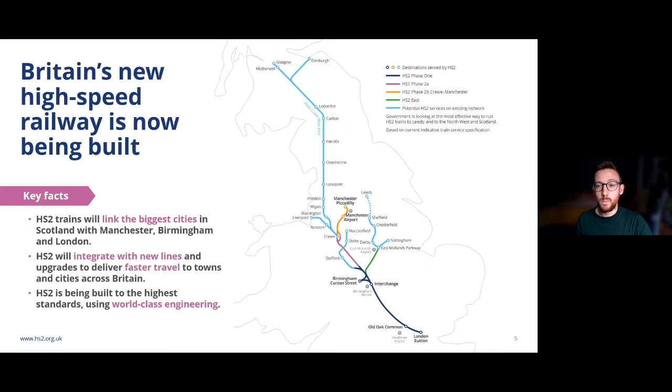If we were to achieve the same level of economic and environmental benefit seen from high-speed rail in mainland Europe and Asia, Britain needs a nationwide high-speed rail network. And HS2 will be exactly this, Britain's high-speed rail network, helping to address the three key problems facing the nation: capacity, carbon and connectivity.

In terms of capacity, UK rail demand has more than doubled in the last 20 years and is forecast to keep growing, with significant passenger pressure on key north-south routes. Further upgrades to current lines would cause significant disruption for passengers and line-side communities and would deliver a fraction of the capacity of a new railway line.

So building HS2 unlocks a massive amount of space on the existing railway by placing high-speed passenger services on their own pair of tracks. HS2 adds hundreds of thousands of seats onto the network each day, and by taking long-distance services off the existing rail network, it frees up space for more freight services, as well as local and regional passenger trains. It's also about connectivity.

HS2 has the potential to change the economic geography of the country and be a catalyst for growth, bringing Britain closer together. There can be more investment in the Midlands and the North, opening up leisure and job opportunities for millions of people. And importantly, it's also about carbon.

Transport is the UK's largest emitter of carbon. For the UK to tackle climate change while supporting a growing economy and population, it needs more zero carbon forms of transport, which HS2 will deliver from 2029. We'll offer zero carbon travel as a clean alternative to long distance car journeys and flights, and that'll help the UK tackle climate change and improve air quality.

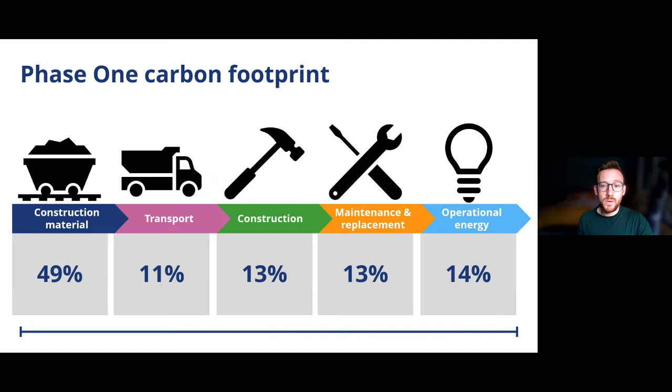About half of the carbon footprint is associated with the extraction, processing and manufacture of raw materials and construction products. About 25% is associated with the transport of those materials and products to site and the subsequent construction and installation processes. So about 75% of the carbon footprint is associated with the construction phase, and the remainder is associated with the next 120 years, the maintenance and replacement, and all of the energy consumed to operate our trains, stations, depots and infrastructure.

At HS2, we recognise that we have a unique opportunity to play a significant role in advancing and accelerating decarbonisation across construction and manufacturing. That's why we're implementing carbon management best practice across delivery.

We've also instructed and mandated this to our main work contractors, so they're required to implement the same carbon management best practice. That means HS2 and our supply chain are working within a common carbon management framework, with compatible and complementary processes in place that support effective and efficient delivery of our carbon reduction objectives.

But we're well aware that reducing carbon is as much about changing behaviours as it is about changing processes. So we know that we need to raise awareness, build capability and motivate action to deliver lower carbon solutions. As part of building capability, we've developed a programme of carbon literacy training, which seeks to provide colleagues with the motivation and capability to take action to reduce carbon emissions.

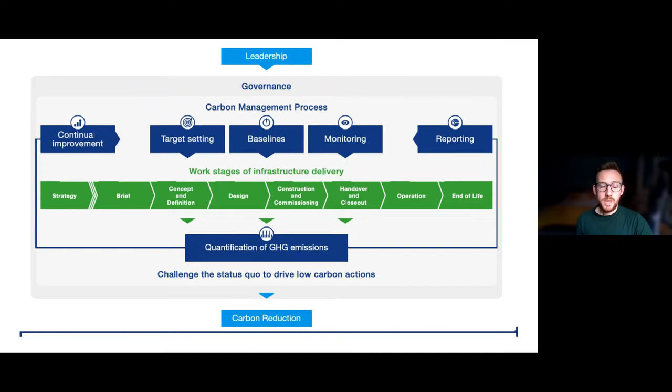In terms of tangible carbon reduction examples, we have Align joint venture, who are delivering Colne Valley Viaduct. They're on track to cut the amount of embedded carbon by 28% within that structure, and that equates to over 63,000 tonnes of carbon dioxide emissions.

They've done this by working really closely with our rail systems experts, and through that they've been able to narrow the structure by over a metre. That's enabled a significant reduction in the amount of concrete and steel needed and the associated carbon emissions. They've also significantly reduced the amount of earthworks required for the approach embankment, reducing carbon emissions from the transport of materials to site, and helping to reduce disruption for local residents by cutting the number of HGVs on local roads.

Thame Valley Viaduct is another great example, delivered by EKFB, showing how contractors are using the latest engineering techniques to reduce carbon emissions from construction. The design team simplified the structure of the viaduct so every major component could be made off-site before being assembled on-site, effectively slotted together like a giant Lego set. That's cutting the carbon footprint by an estimated 33%.

As well as cutting embedded carbon in terms of materials, the approach requires fewer lorries to deliver material to site, cuts waste, and will reduce disruption for the community during construction.

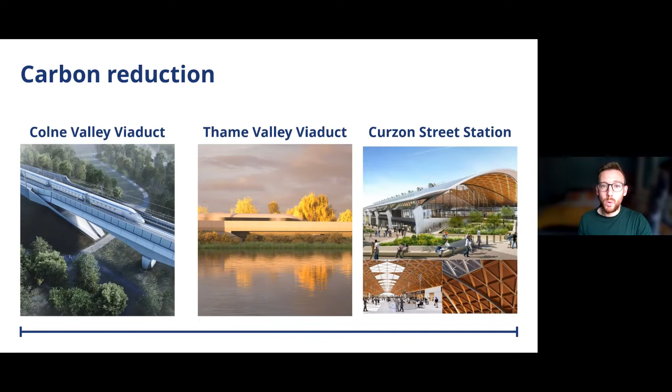The paving in the public realm has been reduced in depth by 38%, which reduces embodied carbon. And we're also using 100% recycled content steel roof sections, which will be bolted together rather than welded to aid future reuse and maintenance.

So our work to cut carbon emissions is well underway. We have the right processes, systems and tools in place, and they've been independently verified as being in accordance with best practice. We're a carbon literate organisation, and we provide our colleagues with the knowledge, motivation and ability to take carbon reduction action.

Since 2016, we've been working to halve the carbon footprint of phase 1, so we're already delivering substantial carbon reduction. We're making good progress against that target, with a 25% reduction forecast by the end of March 2022.

But we want and need to go further, and that's why at the start of this year we launched our net zero carbon plan. The plan explains the work we've undertaken to date, what we're doing now, and importantly, it maps the progress we'll make in the years ahead on our journey to achieving net zero carbon emissions in 2035.

The plan includes a few headline targets, namely to become a net zero carbon business by 2025, to deliver zero carbon travel from day one of operation, and to achieve net zero carbon construction and operation from 2035.

What we mean by that is that we'll reduce emissions as far as possible, and from 2035 we'll offset the residual carbon emissions that we can't eliminate as we build, maintain and operate HS2.

So we plan to work towards net zero by, for example, eliminating diesel on all our construction sites by 2029, specifying and purchasing concrete and steel with half the production carbon emissions of 2021 levels by 2030, and using 100% zero carbon energy to power our trains, stations, depots and infrastructure.

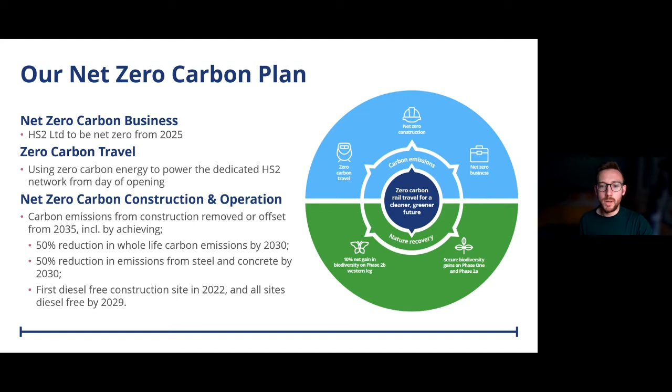To support those targets, we've identified 10 key action areas that will be critical in delivering our ambition. These action areas are really diverse in nature, but for example, they include building a consistent net zero carbon culture, raising awareness, motivating action and building capability to drive carbon reduction performance, and communicating our net zero carbon objectives to stakeholders, being clear about how we'll work together.

There are opportunities to use digital engineering tools and processes to transform and improve project delivery to reduce carbon emissions. We'll need to invest in innovation and form partnerships to speed up ways to cut emissions in our supply chain.

We'll need to work with industry groups and peers, supply chain partners and key stakeholders to make sure our efforts are aligned, effective and inspire action. We're also committed to sharing best practice and lessons learned with the wider construction sector, and we'll need to use our influence to encourage others to take action to tackle climate change.

There is a lot to do to get to net zero, but our work to cut carbon emissions is well underway. And to show you what that looks like down on our sites, I'm going to pass you over to Andrea.

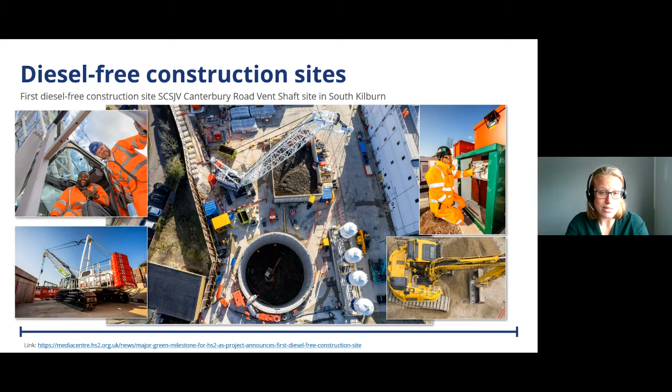I already mentioned our fully electric crawler crane, but we've in fact got 3. So we have 1 at Canterbury Road ventilation shaft, and we have 2 at our Old Oak Common station. As I mentioned, they are fully electric crawler cranes, and we've got 2 160 tonners and 1 250 tonner. So they're really, really big machines. Again, powered by batteries, charged on mains power connection, and then they can run off that umbilical cord system.

You may have seen in the media, but our contractor up north, BBV (Balfour Beatty VINCI), recently deployed a fully electric piling rig to really look at the comparison between a fully electric machine like this versus the diesel alternative. The results have actually been really fantastic. The operators are saying it's a lot more responsive, less pressure on the operative working in the cab, which is really positive to start seeing. So we're hoping there will be more machines like this at this scale and size that we can start to really use and trial across the project.

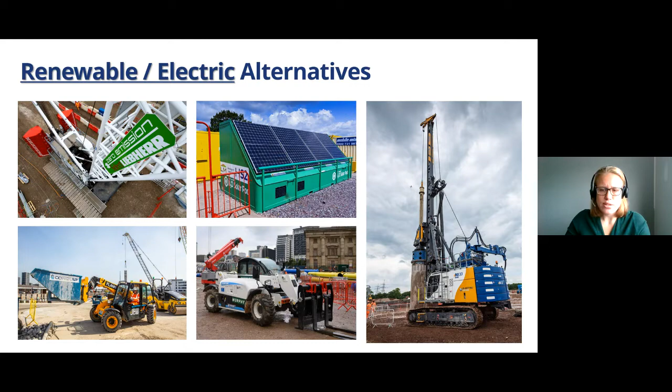Some of the other solutions, hydrogen has obviously been a big buzzword for a while now. It's really great that we've got a range of different solutions, from fuel cell tower lights to welfare units. We've also been trialing two very big hydrogen fuel cell generators, both 250 kilowatts, which are direct replacements for diesel generators at our Victoria Road crossover box in Ealing. The key there is the learnings from these trials will be shared with all of our joint ventures as well as the wider industry, to identify where we can adopt these, what were the challenges, what were the barriers, and how do we get over those to really push these sorts of technologies as construction norms.

Not only are there absolutely zero emissions, they are far quieter, and the only byproduct is deionized water. I was recently on site and did have some - it tastes exactly like any other water you would taste. So it's a really fantastic technology that we're starting to see really increase in uptake across the construction industry.

Essentially, the engine runs off biogas rather than diesel. It's been twofold: the first phase, the engine was fitted into a hybrid Advantair welfare cabin, which makes use of solar panels with the clean air gas engine as the backup power source. Then Oaktech have recently been trialing their standalone generator, which again runs off biogas. Imperial College have undertaken the emissions testing on the engines, and the results are very, very positive.

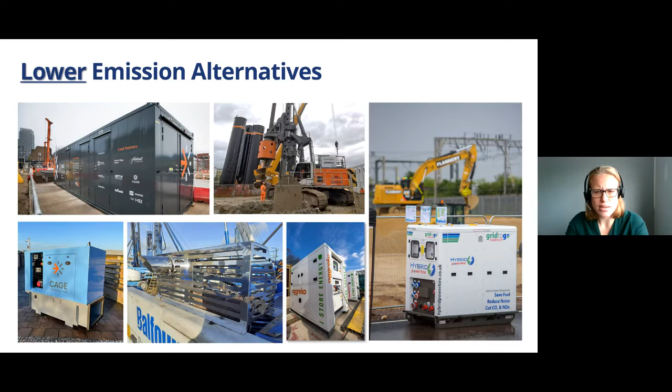We've also been working with Eminox on retrofit solutions to bring older diesel engines in line with the latest, cleanest emission standards. I mentioned the use of biofuels previously, and using battery storage solutions to reduce our diesel consumption, which leads nicely into what other efficiency solutions are there, which is really important within the construction industry, where we don't have diesel-free or diesel alternative solutions yet. What can we do now? Those come in all shapes and forms, from changing methodologies on site to be more efficient, to using different solutions such as retrofit, or hybrid solutions.

We've also been trialing flywheel technology, which stores up the energy so you can have a much smaller generator. You also don't need your generator running for 8 hours a day - it can now be 5 hours a day. So you're really just reducing your fuel consumption, reducing your impact on surrounding communities.

There is a lot of information on these different trials on our HS2 webpage. If you look for the HS2 and air quality webpage, you'll see a bit more information on some of these case studies. As more information on these trials becomes available, we do put it out into the public space and share it across the industry, so that we can all be aligned and making use of that information.

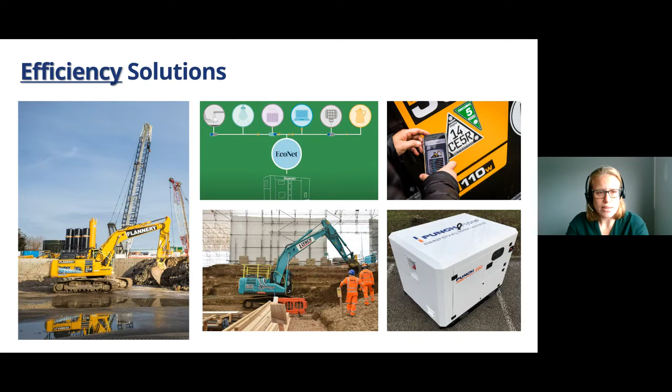Which essentially, just to conclude then, as Mark said, it's not simply a case of saying we think it's right, we'll do the trial and we'll stop there. It's how do we make this the new construction norm? How do we roll this out at scale and use the scope and stretch of the HS2 route to do that?

We're working really closely with the Department for Transport as well as other arm's-length bodies to align plans in the diesel-free space, to make sure we move forward on this journey as an industry and not in our individual silos. We're working with Construct Zero to develop an industry-wide diesel elimination roadmap, which, with implementation of innovations like those already highlighted, will aim to mitigate the risk linked to escalating fuel prices, as well as accelerate the reduction in emissions and meet the objectives we've set out.

There's a lot of work being done in the background, and where we can, we're trying to take immediate action. We've been working on an anti-idling toolkit, which will be released very soon to the wider industry. What that looks at is what we can do with what we've got right now, and simply around education and changing behaviors, we can have a really big impact. We're collaborating with the Supply Chain Sustainability School, our suppliers, our contractors, and academia to make sure we can have a useful pack that the industry can use. So it really is a watch-this-space situation - there's lots more coming as we make progress on our diesel-free journey and ambitions.

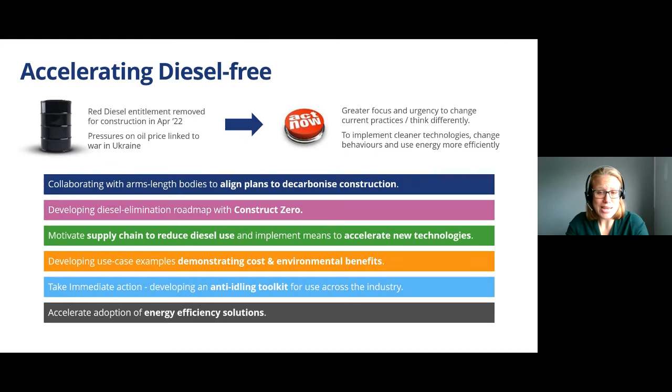What I'm going to do now is hand back to Hannah to detail out some of the work we're doing around creating a green corridor, and hopefully we can touch back on a few of those innovations through the Q&A.

Thank you, Andrea. So, as mentioned by my fantastic colleagues Mark and Andrea, we're doing all we can across the project, using the latest, greenest technology to look at where we can reduce carbon emissions where possible, but also really helping to support the breakthroughs we need to make construction cleaner. But as a project, we also take our responsibility to the natural environment very seriously, and we're actually committed to a net zero loss of biodiversity.

Building the infrastructure needed for a project the size and scale of HS2 means that, unfortunately, it is impossible to avoid some damage to the landscape and the countryside. But we are striving as a project to leave an overall positive legacy for nature, wildlife and people, and we really are committed to that. To do this, we're creating a green corridor, which is going to run alongside the railway and really help integrate HS2 into the landscape.

It's also going to create a network of bigger, better connected, climate resilient habitats that everybody will be able to enjoy. We're planting millions of trees and shrubs along the route, and as these trees grow, they're also going to play an important role in helping fight against climate change, by helping to absorb and remove carbon from the atmosphere. So I'm going to touch on the green corridor in more detail in the next few slides.

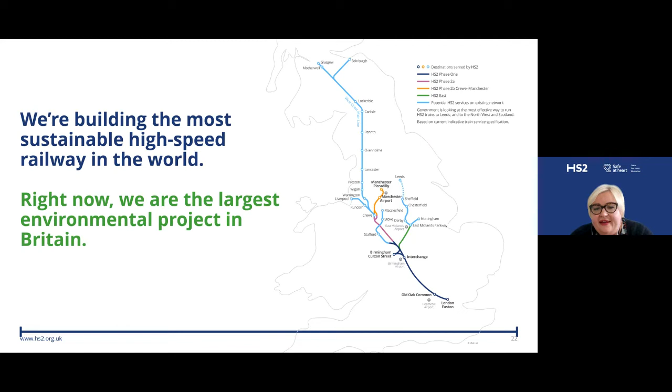All of this is being done while the rest of the HS2 network is still being developed and designed. This means it's just going to provide more opportunities to expand the green network and the green corridor further north, and it's also going to help people and communities living along the railway to reconnect with the natural world. So looking at HS2, it really is such an incredible major opportunity to accelerate environmental benefits in local areas.

So I'm going to move on now and talk about some of the green corridor principles. As I said, we take the environmental cost of construction very seriously, which is why we're delivering an unprecedented programme of tree planting and habitat creation alongside the railway.

Our vision for the green corridor includes planting 7 million trees and shrubs, including 40 native species specific to each location. We're also creating and enhancing 33 square kilometres of new and existing wildlife habitat. To put that into everyday context, this equates to the size of 4,600 football pitches. It really is just absolutely huge, the scale that we're creating.

This is going to increase around 30% more of what currently exists. Our programme of habitat creation includes creation of species diverse grasslands, ponds, native trees and shrub planting, and all this is going to help support a broad number of species such as newts, reptiles, badgers, birds and bats.

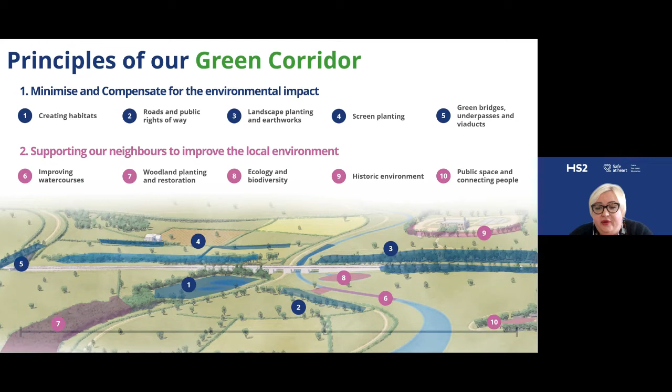Far from being a barrier to wildlife, HS2 is actually going to be crisscrossed by access routes with 140 bridges and underpasses on phase 1 alone. This is going to include 16 specially designed green bridges covered in planting. So it really is incredible what the green corridor is going to do.

Another goal of the green corridor is to minimise and compensate for the environmental impact of HS2. Where we can't avoid an impact, we are creating bigger, better connected habitats. So how are we doing this exactly?

If we look at rural areas like this one shown in the image, we're trying to avoid affecting the surrounding environment as much as possible, particularly through the railway's alignment, and making sure that it blends into the landscape. An example of this is over 32 miles or 51 kilometres of the railway between London and the West Midlands is going to be in tunnels, and around 44 miles or 73 kilometres are going to be in cuttings.

This means that we're actually going to lower the railway within the landscape, which is going to reduce its visual impact. And where we can't avoid having some effects, we're working with local communities to really look at ways we can help minimise it. This is being done through things such as changing the design of the structures we're building to better integrate and suit the landscape that it's going into.

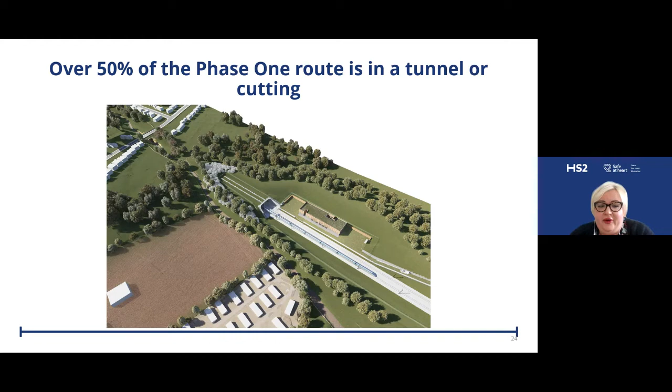We're doing work in urban areas as well. We're building new stations to serve the new railway in some of our major cities. These stations are not just seen as construction projects, but as real opportunities to create transformational green infrastructure. Really, it's going to help play a part in regenerating these towns and cities.

The stations and the surroundings are also going to include green buildings and a lot of new green spaces. We're working to really enhance the nearby wildlife areas in and around the stations, including canals, streams and rivers. Through initiatives, we're looking to improve air and water quality and even help cool the urban environment, which is also feeding into that requirement around looking at how we adapt and mitigate for climate change.

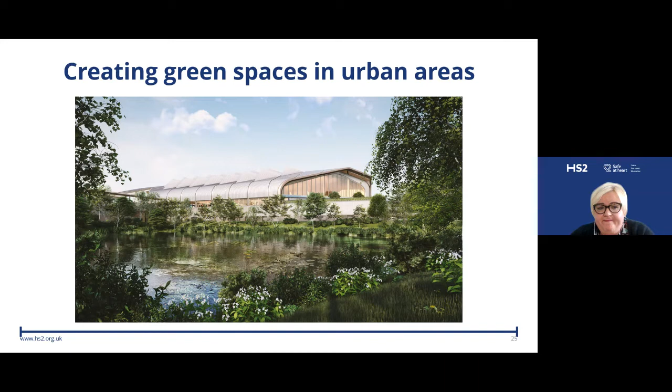We're also working with our supply chain partners to really protect and enhance the local environment. One of our single biggest landscape and habitat creation projects is actually in the Colne Valley on the edge of the Chiltern Hills. What we're actually doing here is we're creating 127 hectares of new chalk grassland, woodland, wood pasture and wetland habitats.

Again, to put that into everyday terms, that's the equivalent of 178 football pitches. So the size and scale is just incredible. And it's also going to deliver a significant ecological gain for that area.

To do this, we're going to be recycling 3 million cubic metres of chalk that's taken from the tunnel excavation. So this is also going to mean it's going to help cut our carbon emissions by working to reduce our road haulage and also the waste treatment that it would require.

Almost 65,000 trees and shrubs and nearly 2 miles of new hedgerows are also going to be planted. And people are going to be able to enjoy this new connected green space with 2.7 miles of new footpaths, cycling and horse riding routes. So some really incredible benefits from just this one habitat alone that is being created as part of the project.

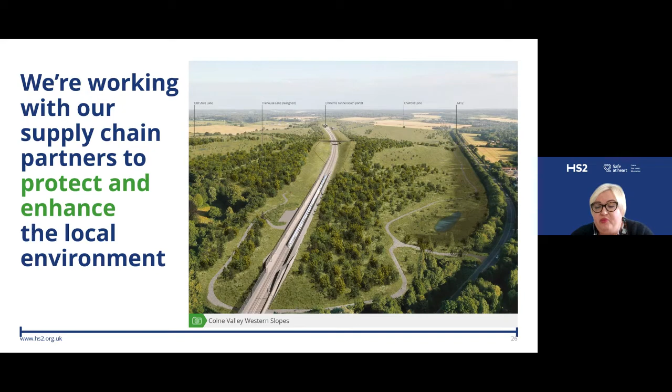As our work to build the railway progresses, so does our work to create new landscapes, habitats and woodlands, which you can see on the screen there. So far, we've planted over 700,000 trees and created over 60 new wildlife habitats. These habitats have included a massive range and been built between Greater London and North Warwickshire. They include species diverse grassland, ponds, native trees and shrub planting, and all of these support species such as newts, reptiles, badgers, birds and bats.

One example of this is South Cubbington Woods in Warwickshire, where we've created 7 new ponds, which are already attracting swallows and swifts, and are also home to newts, frogs and insects. There are also refuges and basking banks for reptiles, bat boxes and fruit trees, which as they grow are going to provide potential bat roosting habitat as well.

We've also got extensive grassland that's been planted, which is going to really support local wildlife, alongside 60,000 new trees, including native species such as oak, hazel, birch, holly and hawthorn. Around 17 hectares of habitat have been created around South Cubbington, including 6 hectares of broadleaf wood, and it also links the habitats of South Cubbington Wood and the River Leam corridor, again really demonstrating that habitat connectivity.

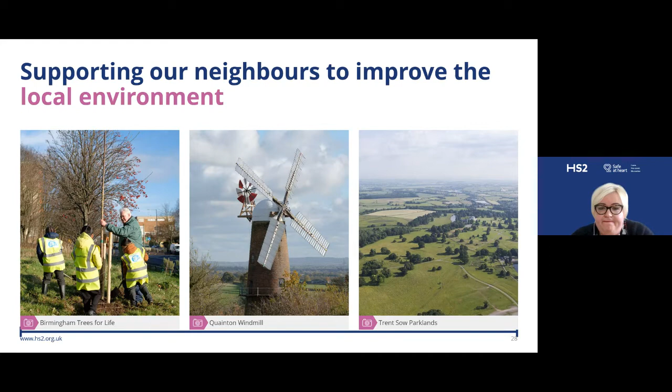As it says on screen there, we're really creating a resilient green corridor that both nature and people are going to be able to enjoy.

So let's do a bit of a recap. We know inevitably that HS2 is going to leave a footprint on the British countryside. We can't deny that, but we are working to do everything to ensure that that is a positive one. We're going to create a railway that respects the natural environment by conserving, replacing or enhancing wildlife habitats where we can, and we're also looking at avoiding or reducing impact on the countryside in the first place, with over half of Phase 1 routes already in a tunnel or cutting.

I think what's really important to note is that, as well as being Europe's largest infrastructure project, HS2 is also Europe's largest ecology project. We are really working as hard as we can to ensure that, as a project, we can leave behind an ecological legacy that we can all be proud of.